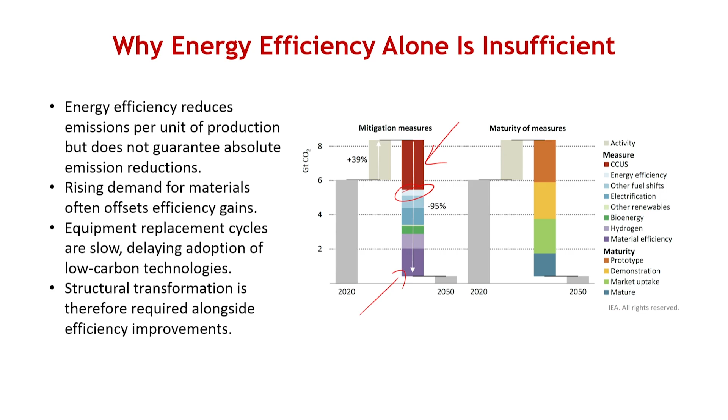That is why CCUS, carbon capturing, and also material efficiency and things like that were primarily talked about as one of the major things this sector needs to focus on. We'll go deeper into these aspects; I'm not concluding it here.

Another issue this industry faces is the asset lock-in issue, as was the case in the power sector also, and as I've been mentioning again and again, asset lock-in is a big issue in this whole transition to net zero emissions, because assets have been bought and have a long life and certain ROIs. Just to take that call of not utilizing those assets to their full life can be a real challenge.

So typically industry facilities operate for several decades, and that's how their depreciation is accounted for. The whole profit and loss journey which industry has been working on, the kind of EBITDA or anything else, has taken a certain amount of depreciation into account. So suddenly writing off that equipment will have a direct impact on the bottom line of that company itself.

But what can potentially be done is that there is a cycle to this industry, and if we can catch the next wave, if we can be ready before the next wave of change comes in—specifically this curve is for the steel sector, and we'll look deeper into this when we get to steel—there is a cyclic kind of investment which goes into this sector on a 25 to 30 year, or even 40 year, basis. If we can capture the next cycle, when it is expected to pitch in, we will have a good chance of moving into energy efficient technologies and other processes which could be much less chemically intensive, giving a direct scope 1 kind of emission reduction.

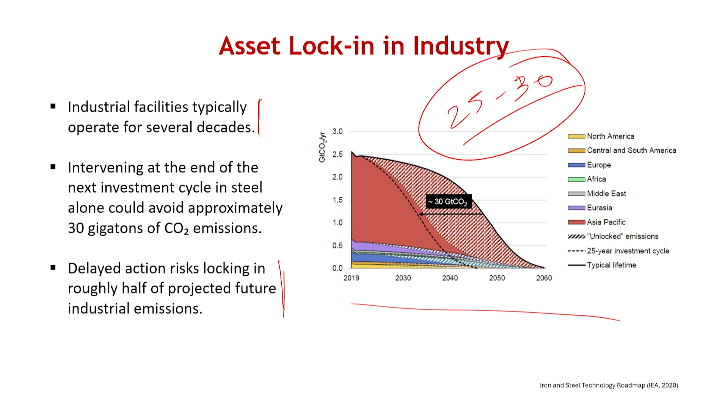So just to tell you a bit about the investment cycle logic: industrial decarbonization will depend upon the timing of the capital stock turnover. Usually it works like this: you do capital investment, then start selling the goods, generate cash, then purchase more equipment, install it, and produce and sell again.

This is the operating cycle where cash goes out as outflow, you purchase equipment, install it, start producing and selling it. Once you start selling, there will be a cycle where you again take a decision to invest, and once you start selling, you start making some money around it.

So either you will go for a capacity enhancement, or upgradation of technology, or the equipment will have its useful life ending, so you will need to bring in new equipment to continue this cycle. You will have to take a decision at a certain point where you go into this capital investment cycle, where you'll spend a lot of cash. What you want is that when you take this next decision, you should be able to install a new set of equipment which is more energy efficient and less chemical intensive. Missing these windows will significantly increase the long term mitigation plan, because once installation is done, to uninstall becomes a very tricky subject.

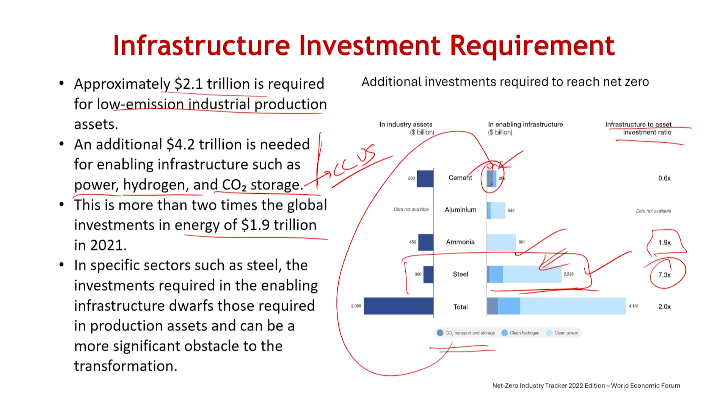And on top of it, if we don't do it at the right time, we might again miss that bus, and that kind of issue will continue to prevail, right? Some further infrastructure constraints which will come are with respect to technology availability, because we are talking about three things: carbon capture, clean hydrogen, and clean power.

The challenge which is expected is in clean hydrogen. Currently, clean hydrogen is very, very low, and also very expensive. And while this industry is betting big on clean hydrogen, whether clean hydrogen would be available in 2050 is another challenge which this industry will have.

So there's a lot of technology uncertainty built into the whole assumption of this industry transition. And as I've talked to you before, overall the industry is betting quite big, specifically with respect to cement, and steel as a second thing, on carbon capture. CCUS - they are betting big on CCUS overall.

And CCUS is not an easy technology - at least as of now, not very cost-effective CCUS solutions have been demonstrated. Not very cost-effective solutions of CCUS have been put in terms of reliability of technology. CCUS is still an unproven technology overall.

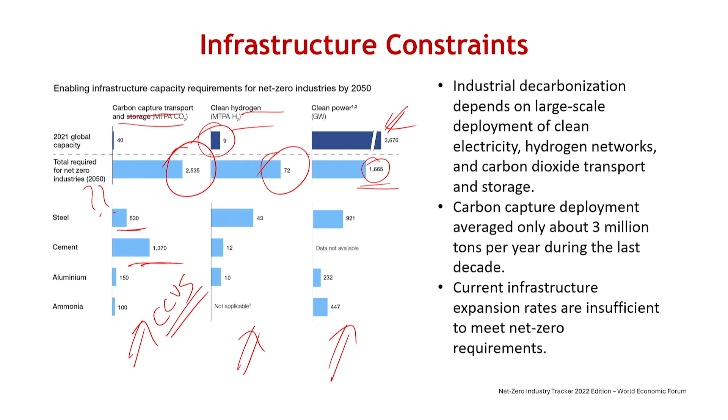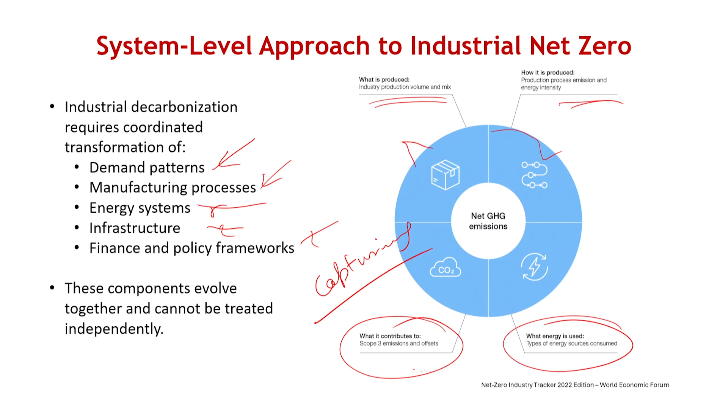If we just take a quick snapshot of where we are today, while we are talking about all this transition, which has to happen both for energy as well as for process as well as for carbon capture - transition has to happen on all three angles, and it has to happen at the right time, at the right cost, and a lot of money has to go into the system, it has to be a coordinated effort.

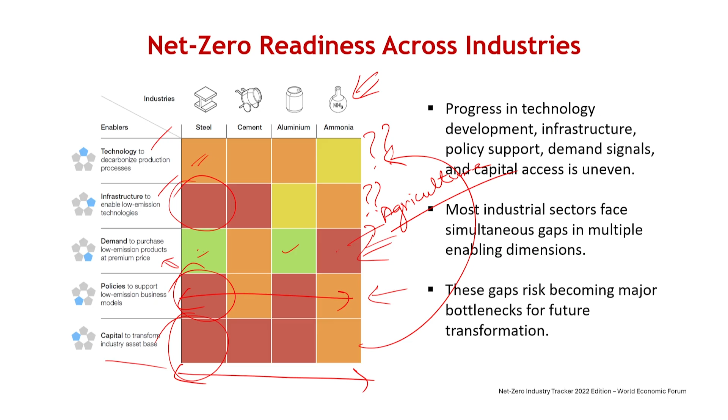Just looking in terms of technology readiness versus deployment, that was the first vertical. In terms of ammonia, the technology readiness from a blue hydrogen perspective - they are betting on blue hydrogen - that seems to be ready, almost ready.

For the steel sector, around 2025 it was expected that DRI, electrical energy based EAF with carbon capture will kind of get rolled out. So that's almost there. There are still some challenges around it, but it has been kind of rolled out. So at least one technology barrier we are kind of crossing here, which was looking yellow - it will start looking green or slightly less yellow very soon.

The aluminum sector also is looking interesting from that side, because at least partial technology is expected to get developed around this time itself, and hydrogen furnaces are expected to come in the next 5 to 6 years. Cement, however, since it primarily depends upon carbon capture, is still waiting for technology development, and it's expected that later this decade some technology breakthrough will come. Let us see how it gets rolled out.

But the bigger challenge which will come is that whenever the technology is developed, will commercial availability of this low cost deployment or large scale deployment of these technologies be possible or not?

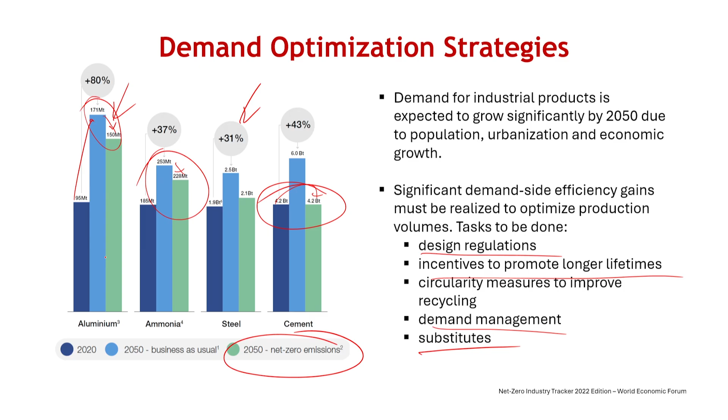So to touch that sector itself would be challenging. But on the other hand, if we have to really work on this and move towards demand management—where we are talking about reducing ammonia and other things—we need to continue working and bring in the right policies to manage it. What is also being done in parallel is specifically with respect to steel and aluminum: targets are being taken on the maximum potential emission reduction in both primary production and secondary production.

Secondary production means you can start recycling or reusing the material itself - recycling steel and aluminum generates significantly lower emissions compared to primary production. A lot of emphasis is being placed on bringing aluminum and steel back into the ecosystem and manufacturing industry through collection routes or other routes. We'll understand this more when we go into the sector.

If we can do that, and also power it using renewable energy sources, we could potentially be talking about a significant portion of these materials being produced through almost zero emissions as far as energy goes. Process-related emissions will also be reduced a lot, because you're not melting those materials where the maximum emission occurs. You will have a material which is ready, which just needs to be reshaped and repurposed. Even if it needs to be melted, it will be melted at a much lower temperature, through much lower processes.

You are not going into the fundamental process of taking iron ore and converting that into usable iron - you're not talking about that. You're talking about a process where you use processed steel or processed aluminum, which needs to be repurposed, reshaped, and remade for new use.

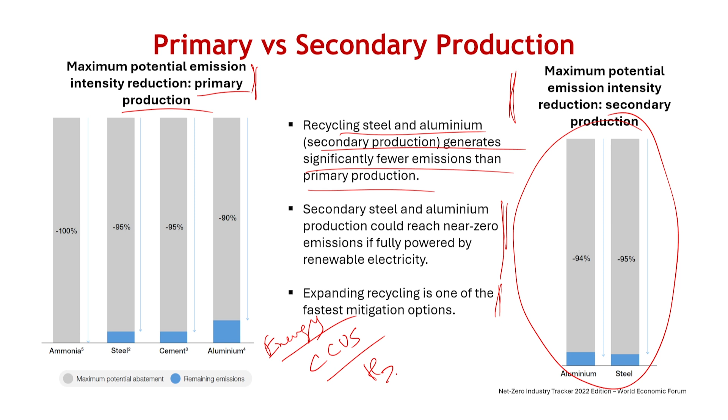So expanding recycling is one of the fastest mitigation options we have overall, and that is being worked out a lot in this industry, while emphasis is also being done on primary production emission reduction. With primary production, emission reduction is being talked about through alternative energy, CCUS, and hydrogen - these are primarily being worked on the primary emission side.

In terms of energy consumption, steel is probably the highest energy consumption sector overall. Electrification of the fuel mix has potential there. Aluminum has potential too, though it's not as energy intensive - steel is the most energy intensive sector. Today the sector relies on fossil fuel. Further efficiency gains can be realized, but as I've mentioned, energy efficiency per se may not play that big a role.

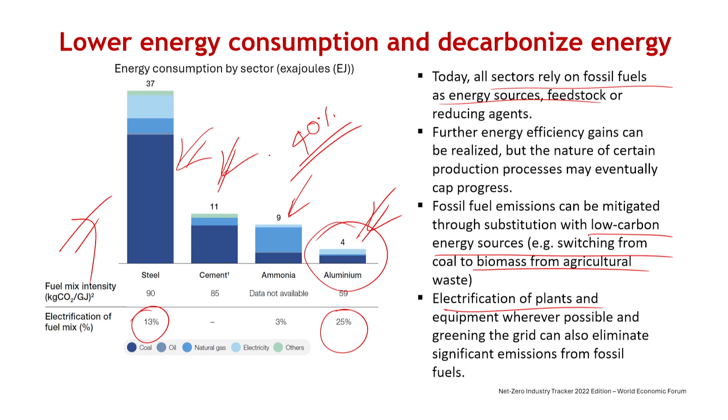Fossil fuel emissions can be mitigated through substitution of low carbon energy sources, switching from coal to biomass, or electrification of plants. But overall, there is limited potential for energy reduction in this area, specifically with respect to ammonia. For cement, there isn't much data, but cement will depend a lot on CCUS. So overall, energy will play a role as further 40% of emissions still come from energy, but not for all sectors - energy will play the biggest role in steel, not such a big role in aluminum, and it has its own limited role in the cement sector.

Looking at the current targets around 2030, overall the sector has made some decent progress on that line. Specifically, aluminum has made some decent gains - the movement of aluminum is looking interesting. Steel is starting to look interesting too, and this has primarily happened because of use of secondary material. We'll go deeper into this in the specific subsector analysis. Steel and aluminum are starting to look interesting, but cement and ammonia have not made much progress.

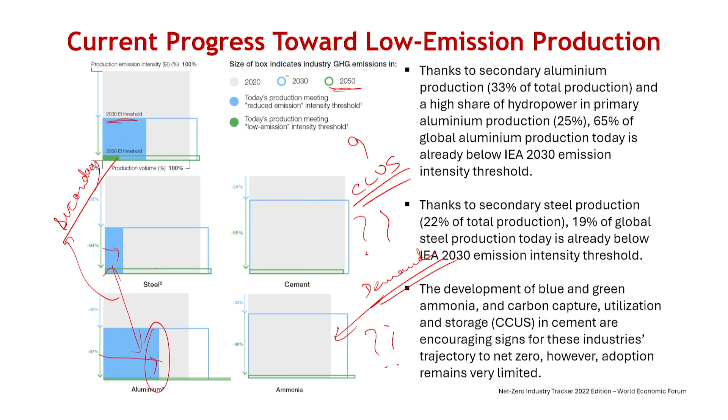Ammonia struggles more because of the demand side issue, as the new material's demand is not getting picked up, and cement struggles because of the CCUS issue, which still remains kind of a black box for this transition to happen. So from a sectoral perspective, aluminum per se is holding on to its promises more than anything else right now. But this is another way of tracking how each sector is working around this, while you look into this data deeper.

On the demand side, let us understand these challenges before I end today's class. When you move from a normal material to a green material, you need to break this whole thing into two parts. One is the cost of the material itself, and one is the cost of end use.

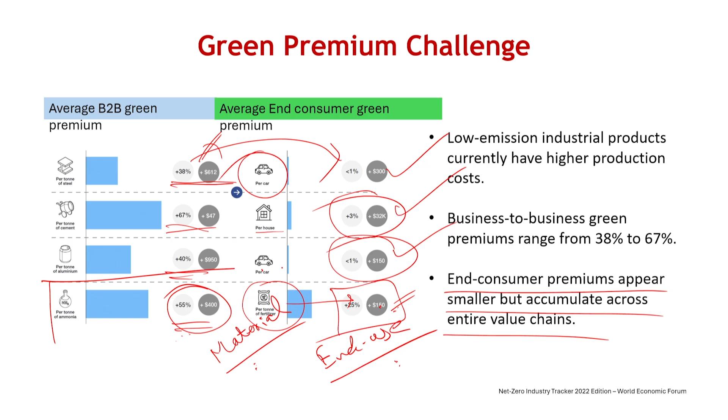But for most uses, the end user may not get impacted so much, except for ammonia in this case. Overall, rising fertilizer and energy costs directly affect food security. It impacts farmers, who are anyway struggling to make ends meet. So governments are expected to manage these impacts by ensuring socially equitable transitions—that's what governments need to do.

But you can look at this picture from two sides. The strata of people who can afford to buy a car—for them, a 1% or 2% impact won't mean much, and that's probably where green steel and green aluminum cut in. Even for many houses, the housing category will have huge variation depending on who is buying, but from a cement perspective the impact may be a bit limited. It starts getting very tricky when you go into ammonia, which directly goes into farms and fertilizer.

So we'll continue to look into this industrial sector—there's much more to talk about. See you in the next class, where we'll go deeper into the industrial sector and then start moving into the steel sector itself. Thank you, and see you in the next class. Bye-bye.